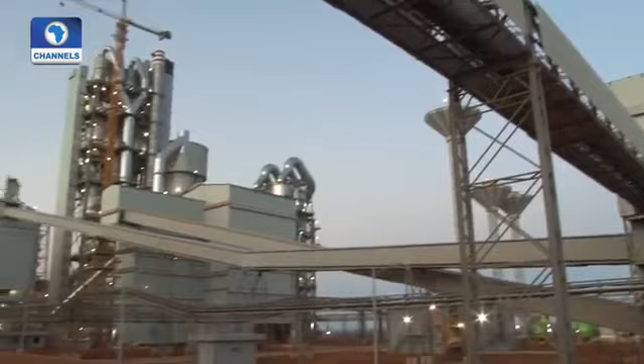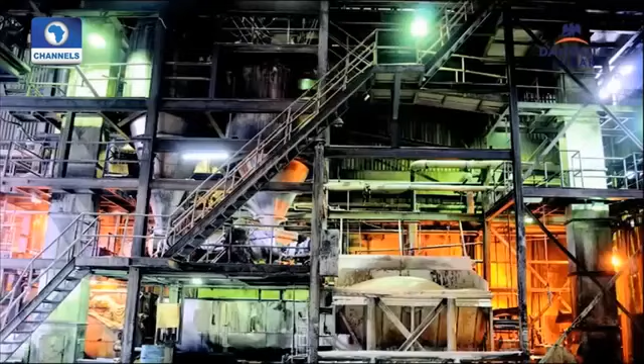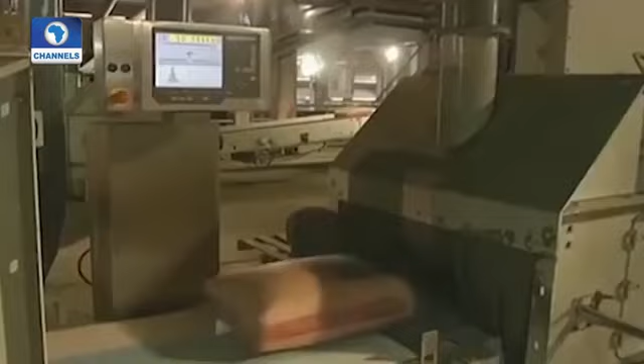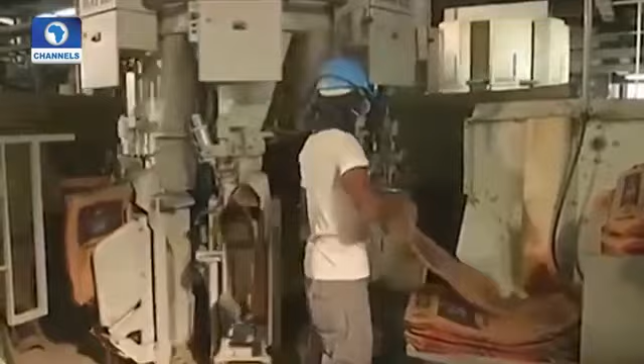His business acumen has been amply demonstrated in successful investments in sugar, flour, steel, salt, pasta, real estate, and beverages. He has also conquered the cement manufacturing business. Indeed, his company is Africa's leading integrated cement company, engaged in the manufacture, preparation, importation, packaging, and distribution of cement in Nigeria and 14 other African countries.

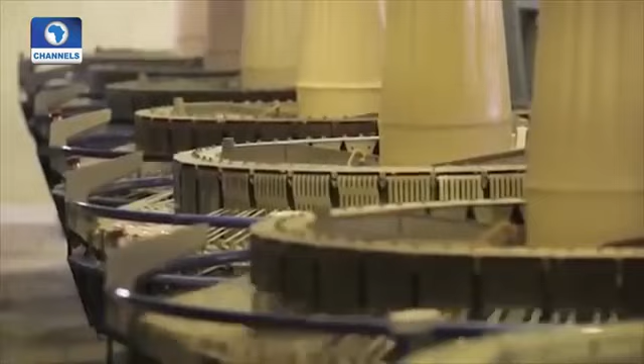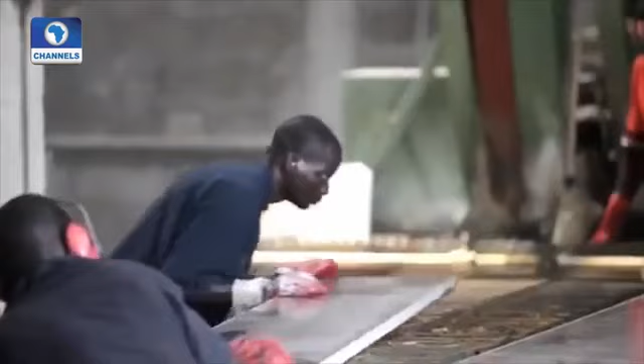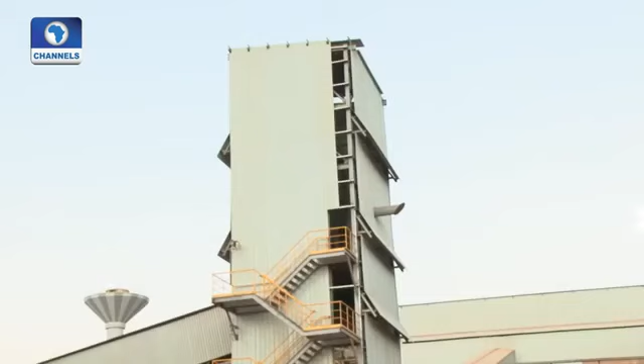The current total production capacity in Nigeria from its 3 existing cement plants is 29.25 mmtpa. It is also the biggest quoted company in West Africa and the only Nigerian company on the Forbes Global 2000 companies, with almost $14 billion market capitalization in the Nigeria Stock Exchange. Without doubt, therefore, Alhaji Aliko Dangote is success personified.

What gives me joy is how many people I've actually helped through job creation, through doing so many things, and in future I want to make sure that Nigeria is self-sufficient in rail lines, in power, in a lot of things.

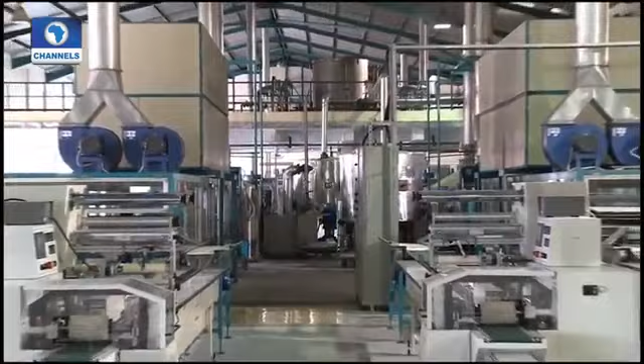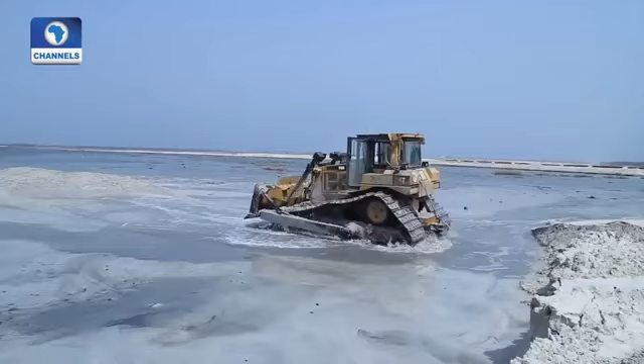3 years ago, the Dangote Group, which focuses on provision of local, value-added production and services that meets the needs of the African population, approached the Central Bank of Nigeria to indicate interest to invest in refining crude oil so as to facilitate the production of petrochemicals, fertilizer, and fuel.

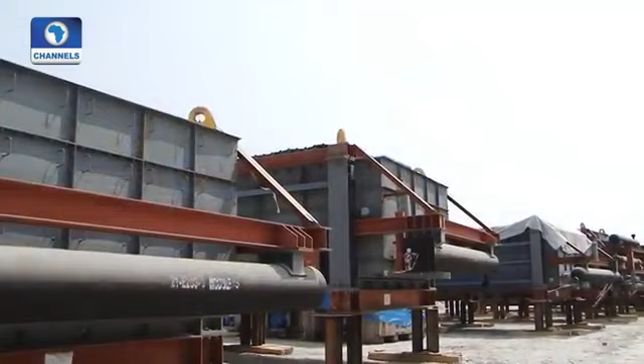Today, the Dangote oil refinery project, which is valued at $14 billion, is ongoing at the Lekki Free Trade Zone, Lagos State, with a tantalizing target to refine 650,000 barrels of crude oil per day.

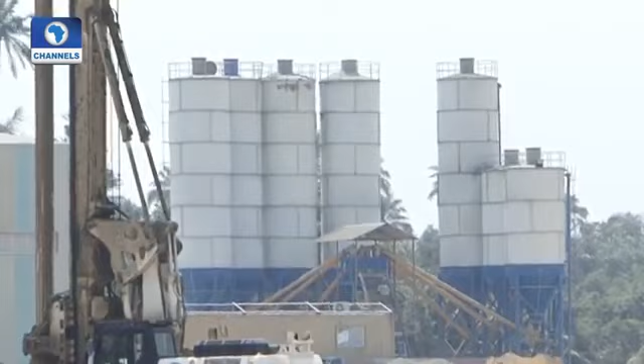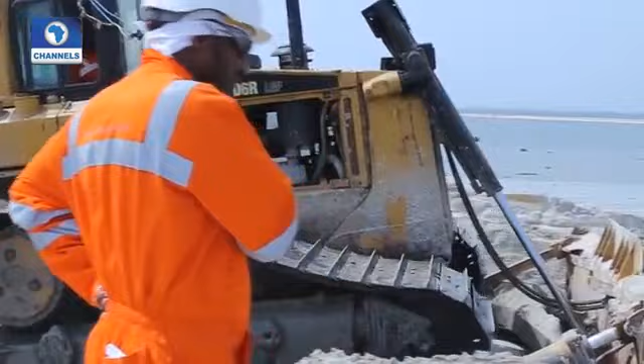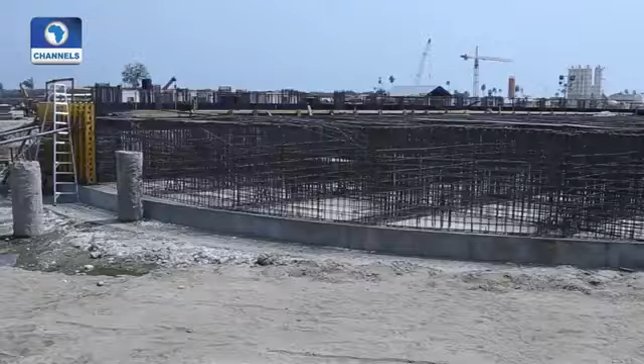The area of the refinery plot is 2,135 hectares. It has various process units and then dispatch facilities. It has its own captive power plant, sulfur dispatch facilities. It has a flare unit. It is a self-sufficient refinery that produces the power within the refinery, whatever the power consumption required.

This refinery will produce gasoline, diesel, aviation fuel, household kerosene, slurry as raw material for carbon black, as well as 2.8 million metric tons per annum of urea and ammonia.

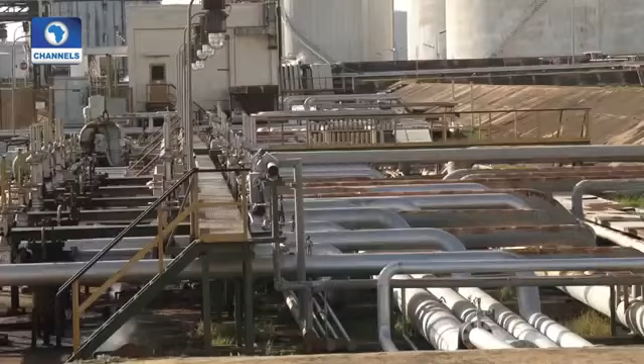A combined refining capacity of Nigeria's 3 refineries comprising Port Harcourt, Kaduna, and Warri is put at 445,000 barrels per day. In the recent past, it has produced about 6 million liters daily for premium Motor Spirit.

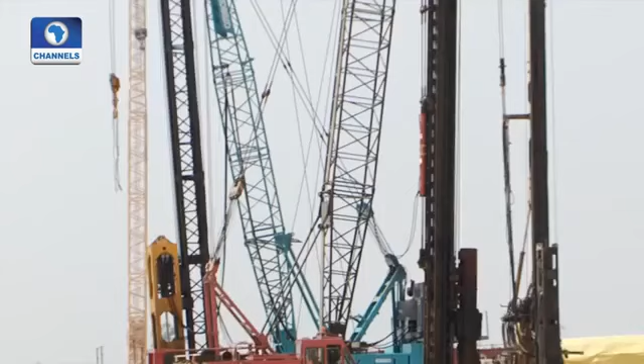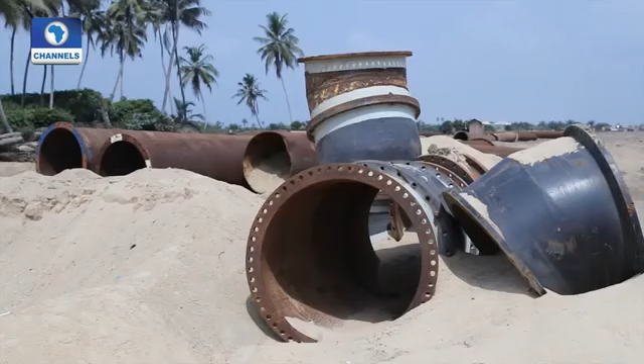When completed, this refinery will refine 650,000 barrels per day with yields of 55.2 million liters of PMS, 3.4 million liters of diesel, the high-end Euro 5, and 8.8 million liters of aviation jet fuel daily. At 55.2 million liters of PMS, Nigeria's daily consumption of 40 million liters is already taken care of.

Before now, Nigeria was a paradox, being one of the world's largest producers and exporters of crude oil, and yet one of the biggest importers of refined product. Trillions of naira is spent every year in subsidy claims for oil marketers, not to talk of immeasurable man-hours lost each time there is real or artificial scarcity of fuel.

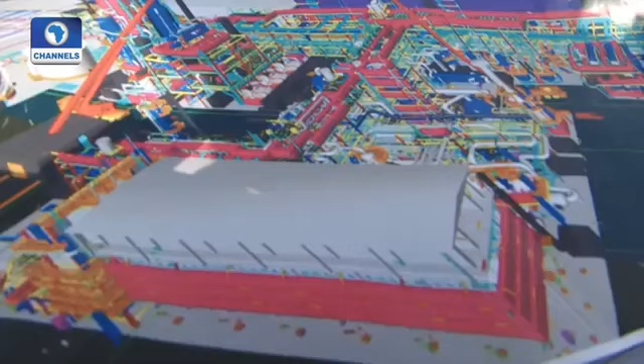But now, the first of its kind integrated oil refinery project will resolve this paradox with its largest single train refinery in the world.

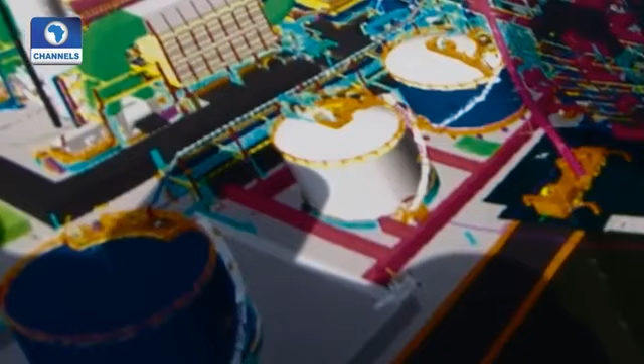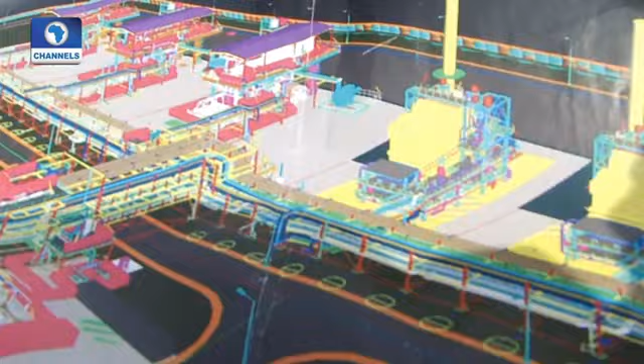In Dangote Group, we like challenging things and we like to make sure that we do things where we'll make our country proud and also self-sufficient. So once we do this, Nigeria will never ever import any oil at all. No petroleum products, zero. We'll meet up the full capacity, and we've taken up a land that will allow us to grow 3 times. So we have plans of also further growth.

But the challenges, I think, we'll be able to surmount most of them because, number one, we're a local domesticated refinery. Most of the logistics cost will not be there. And then we don't have to pile up a lot of petroleum products in stock because the refinery is there, it's working. Obviously, yes, maybe we'll have about 15-20 days of reserves.

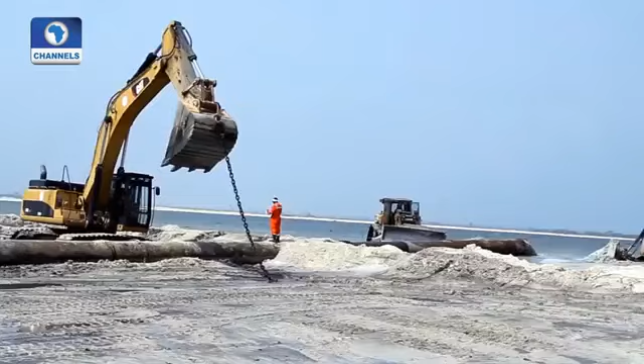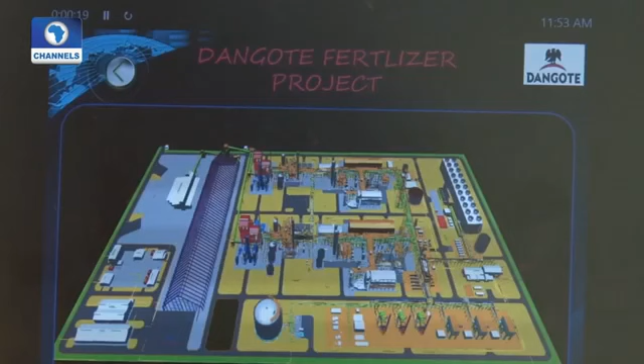After months of work on site, the dredging has covered a major portion, although heavy-duty work is ongoing. The activities and spillover have also been well thought out, and a smooth supply and distribution system is what will be obtained here.

This is the setting that prompted the governor of the Central Bank of Nigeria, Mr. Godwin Emefiele, to pay an impromptu visit to the Lekki site of the world's biggest refinery project.

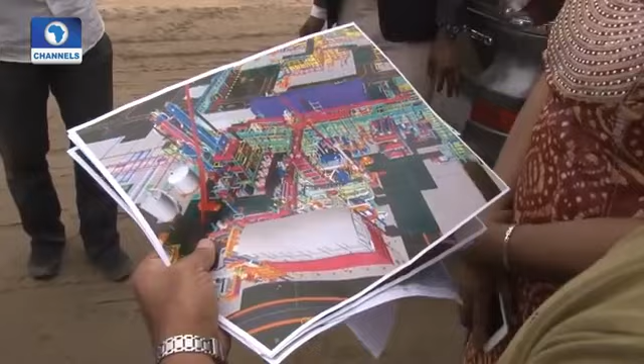Is it gas? No. For crude, we load by ship, but we're inside the sea - they call them SPMs. So you discharge, and we can also load 100% of the product through the sea. They told you Suezmax vessels use 3 SPMs.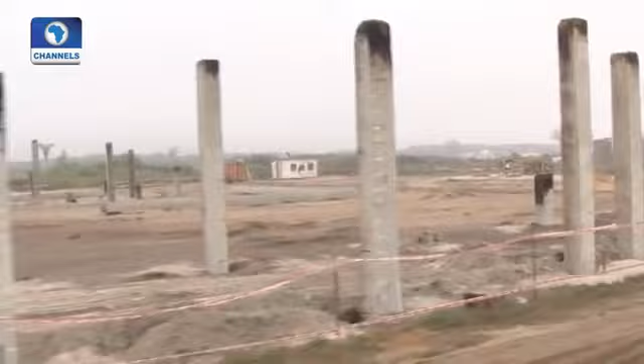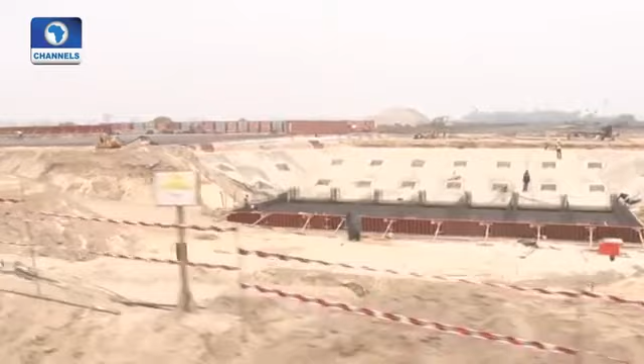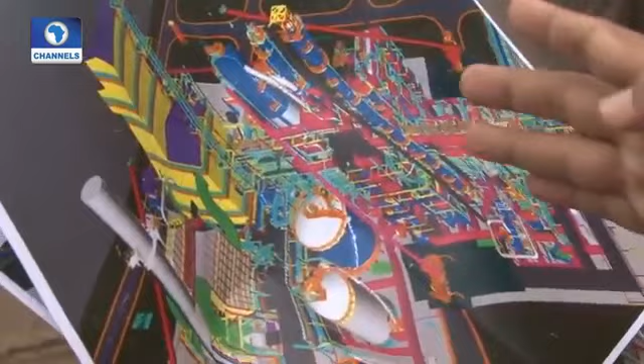The visit, which was like the gathering of eagles, afforded the CBN helmsman the opportunity to discuss with Africa's greatest entrepreneur of all time the critical need for a foreign exchange portfolio that will aid the importation of critically needed equipment - interest charges, handling charges which you pay foreign companies, demurrage.

So all this - for example, now if he needs, maybe he goes and buys one ship. That's what he does - you go and buy 35,000 tons. He doesn't have to buy. He will just say, okay, every day give me 3,000 tons. So you don't need all the storage and all the other costs. His bank will issue us an SBLC.

And that's 26 Naira per liter. You see, this is how they come - it's a precast driven by...

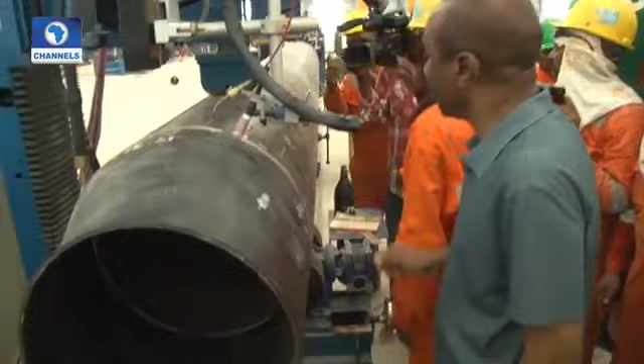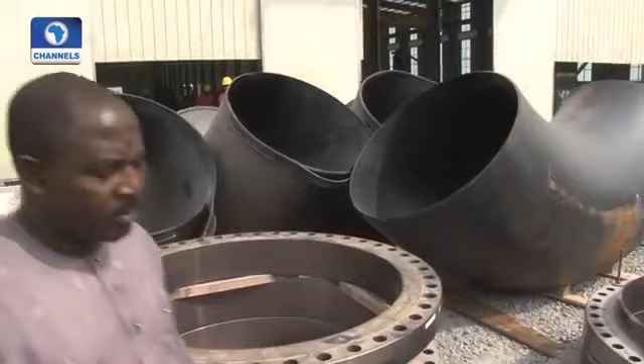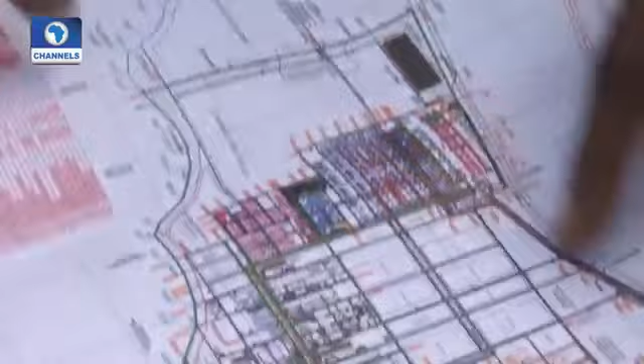You can see this is the whole site, and this is the fertilizer area. This is just the fertilizer area. So now you have the whole site, and this is the plot plan. You can see how the tank farms are coming, the various equipment coming in all over the place.

Apparently elated by the noble and patriotic vision that gave birth to the Dangote oil refinery project, as well as the infectious commitment of the investors towards the success of this ambitious enterprise, the governor of the Central Bank said: 'Your ongoing $14 billion refinery investment will enjoy our support, no doubt. We are doing this to fast-track the importation of equipment you need for speedy completion of that project, and to encourage other Nigerians to follow suit. This tour is necessary to lend our support to this laudable project that will transform Nigeria's downstream oil sector.'

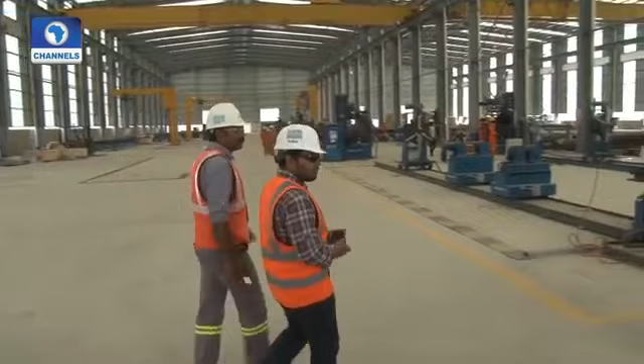Why have I come here? I have come here to see, so I can also tell Nigerians that we need more. We need to support and give support to people like Aliko Dangote for what they are doing for Nigeria. This is a time when we are talking about diversifying our economy away from oil.

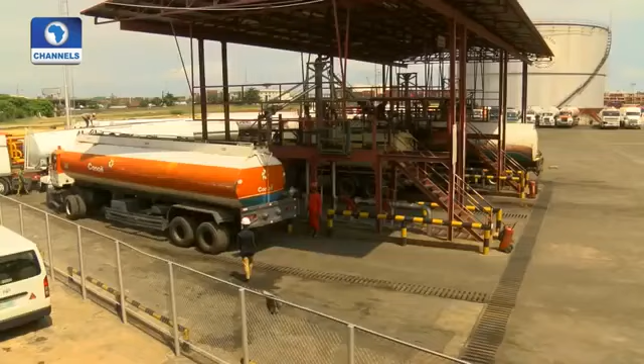Fertilizer's output is ammonia and urea. The petrochemical output is polypropylene and polyethylene. The refinery's output is the various final petroleum products. These are products that we today import into the country. If we dimension how much the country spends on importing these products, consuming foreign exchange, this stands at close to almost 35 to 40% of our import needs.

So you can imagine what would happen to the savings in foreign exchange by the time the fertilizer plant is completed in 2017, and the petrochemical and refinery project is completed in early 2018. We expect that by the time these projects are completed, they will not only meet the needs of our domestic requirements, but we will be exporting these products to the point where we will be selling foreign exchange to Nigeria, to Nigerians, and to the Central Bank of Nigeria to the tune of almost $6 billion a year.

That is the kind of project that we think we should support, and we think we need to encourage more Nigerians to begin to think like Alhaji Aliko Dangote.

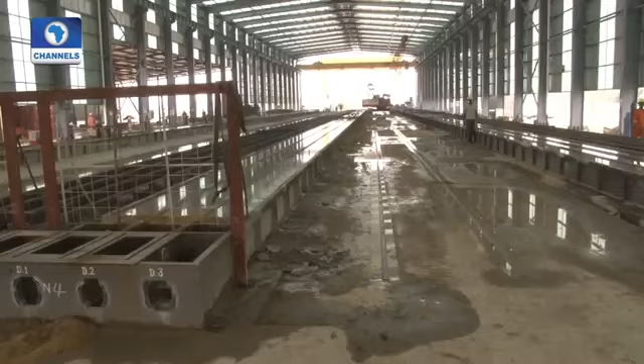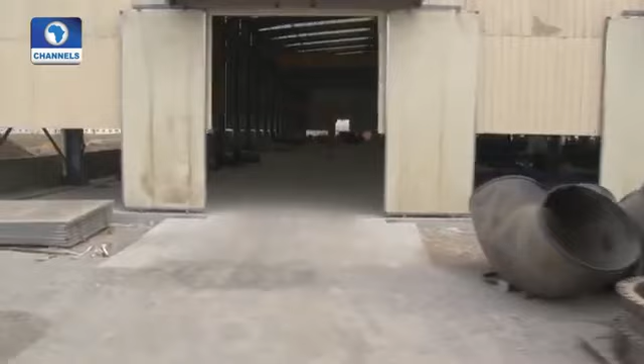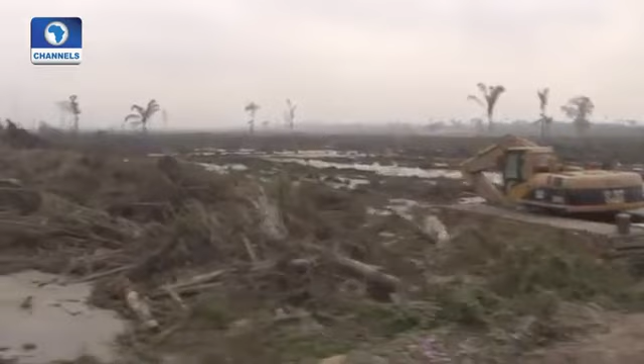You can float on the water. If you float on water, uproot all the trees, then you burn them. After you burn them, now you clear them out, then you pump sand. Compact, yes, and then piling.

I know the sand—they charge you per cubic feet. It's not that they don't know the measure. There's a measure, you and them will measure it. Like now, if you exceed that, who is charging you? The people who are there—it's not that they just come and feed everything.

That's right, they don't know. No, this is too young to know. They're the biggest in the world. I told you, from Belgium—those who brought the number 1 and number 2 products to the world, and the number 5 too.

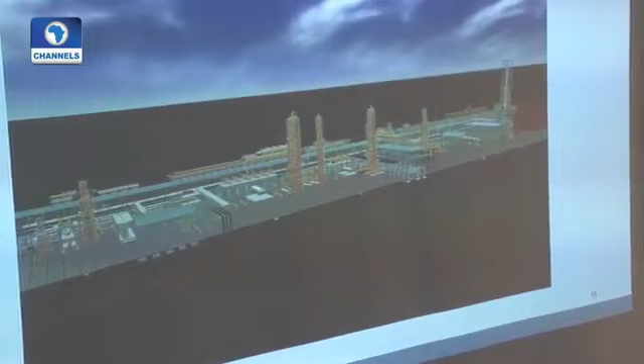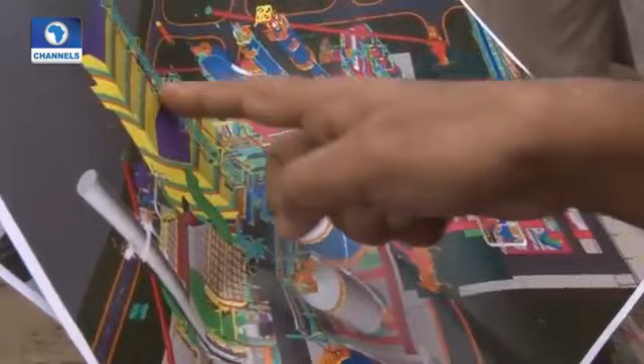We cornered two key officials of the Dangote group to get a grasp of the driving force behind this incredible investment in sub-Saharan Africa. It's the largest single-line refinery project going on in the entire world today, entirely funded by a Nigerian company, in our own great country, with 650,000 barrels per day. It's not only a refinery—simultaneously we're building a fertilizer plant, and it will also be a petrochemical complex to be integrated.

The timing of this project could not be better, coming with a new government who clearly have come with a message that Nigerians all have to wake up to a reality check. We could no longer afford to be an import-dependent economy, and the resources are not there—Nigerians have to tighten their belt, and everybody has to go back to the basics, back to agriculture, back to manufacturing. So I believe it's not surprising that the governor of the Central Bank himself was there, because this is what he wants to see more Nigerians doing, to make his job easier.

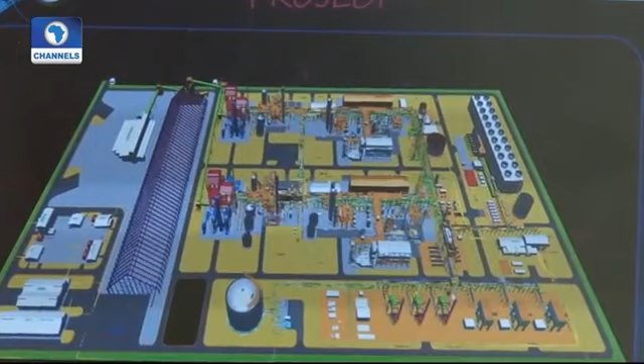At the moment, everybody is on his neck for foreign exchange, so he would be very happy to see investments that are going to conserve our foreign exchange by reducing our imports. In fact, ultimately, investments that will begin to make it possible to repatriate foreign exchange back into our economy. This is really going to be a boon to the country.

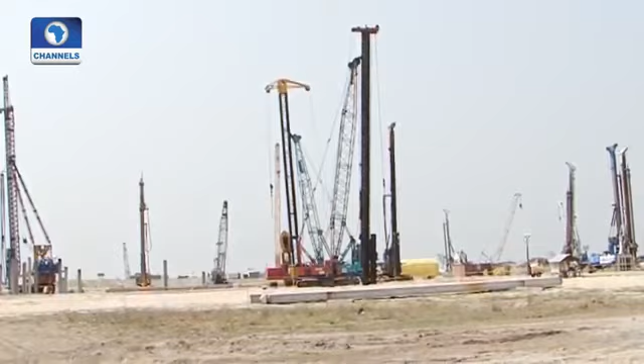The Nigerian crude is a sweet light crude, which has always commanded a premium in the past. But one of the reasons oil prices have been going down is that Saudi Arabia wanted to ensure they retain market share, because the Americans, especially with shale oil, have been developing it very fast. Their shale oil production and output has been increasing fast, and all the oil which comes out of that is shale gas and what they call LTO, light tight oil, which is also very light, a sweet crude.

If you see the exports from Nigeria to the US, it has completely collapsed. It was one of our biggest markets. Now exports to the US have collapsed, and the country has been struggling to get importers for the light oil. The US has a lot of refineries designed to handle light oil.

In most of the other parts of the world, to maximize profits, they started going for heavier, dirtier, high sulfur crude, because it was all available cheap. So the refineries were designed to handle that so they could maximize profits. So now when our primary market collapsed, we have been struggling to get enough demand to export this crude.

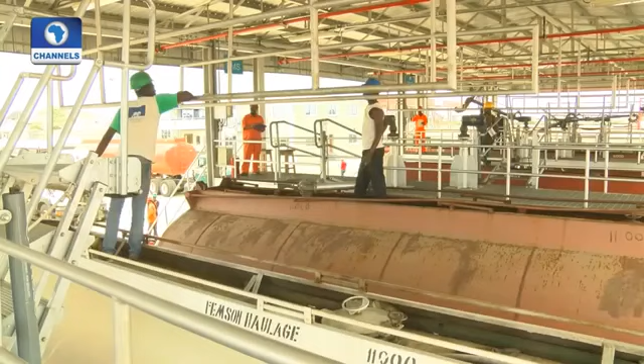And that is why, if you see the Nigerian crude, even the prices have been coming down. So we are now looking for a market instead of commanding a premium for our commodity, which is the oil, and we are still continuing to import the finished product. So this refinery will answer all these problems. Skills, market focus, and management orientation will clearly differentiate Dangote refinery from the pack.

We recognize that in every situation where there are opportunities, there will be challenges. Our goal is to address, circumvent, or clear these challenges. Government policy is one area of challenge. If the policies are not right, you're going to have problems. But these are risks of the business that we're willing to take, and in the investment game, it's a question of weighing your risks and your rewards.

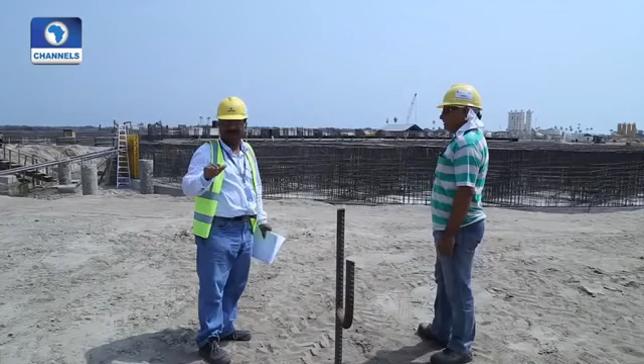We believe that despite the poor policy environment, we are willing to risk this investment because we believe that the rewards that come afterwards will be more than sufficient to justify the risk we're taking. The growth potential and trajectory impact is immeasurable.

Everyone is waiting. The whole state, Lagos, is also positioning itself to be a part of history. He has chosen this day to do his activities, and it's for us as a government to make sure we give him all the support we can get.

What is very important is that Dangote is not going into upstream exploration in Lagos. Rather, it's in refinery and petrochemical, substantially midstream and downstream. We're not competing. What Ibile will be doing is to go and look for the gas and bring it from under the soil so that we can service Dangote in the long run.

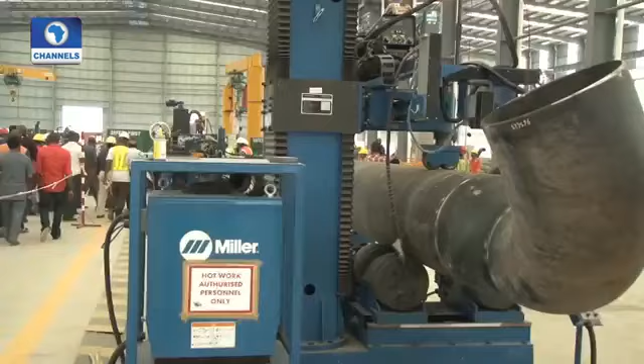So Dangote's intervention alone is going to change the entire economy of Lagos East as we see it today. And if you now combine that with the activities going on inside the free trade zone, the proposed airport and the deep sea port, it's going to end up in a massive transformation of that sector.

But that is not only the benefit Lagos will get. If you see the impact of tank farms in Apapa, with respect to all the trailers coming from all over the nation massing inside Apapa, it has almost collapsed the economy of Apapa. And that is not going to be sustained.

That is happening because we are bringing all the petroleum products we use in the country from outside. So if Dangote can produce from here, there will be no motivation to keep building more tank farms in Apapa. I think a lot of them will now be fading away gradually, and then you'll see our economy coming back again.

So for us, it's going to be multiple benefits to the states in terms of income, in terms of GDP, in terms of employment, in terms of helping us resolve the Apapa economic challenge, in terms of traffic.

Because the architecture there, as it's going on now, a lot of impact assessments are being tidied up with respect to transportation impact assessment, environmental impact assessment, because we don't want what happened in Apapa to also happen in Ibeju-Lekki on account of Dangote's activities.

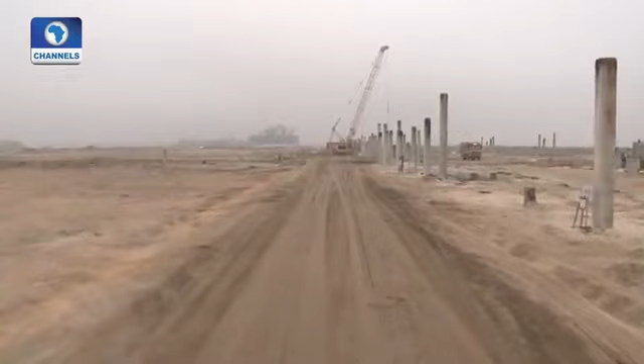And mind you, that place is not within town. So if there are vehicles coming in to take the products to other parts of the country, you just pass along the Epe corridor, and then you are in Ogun State, and you can go to Ore, you can go to the northern parts of Nigeria. Unlike if you were in Apapa, you still have to pass through Lagos Island, the Lagos mainland, Oshodi, until you get out of town.

The impact of the Dangote oil refinery project on the Nigerian economy will be both massive and monumental. The impact will be heavy to start with. First of all, there won't be any shortage anymore. And then money will not be tied down. You don't have to go and import 3-4 months stock, because the refinery is working. We have massive storage, which I think will assist in the supply chain.

There's something people don't normally notice. If you go around, outside Lagos or Ogun, majority of the filling stations, you see that yes, there's a filling station, but there's no activity. Actually, I didn't know this until we were driving in Kaduna with Bill Gates in January, and he said that this is the only country he has seen where the filling station is not working.

You see filling stations with people there but no fuel to sell. This will not happen anymore. Anybody who opens a filling station will have something to sell. Imagine the thousands of filling stations we have—even if there are only 5 people each, it's a massive number of jobs created because we'll make the product available. You don't have to buy what you don't need; you only buy when you need it. So it's going to open the market dramatically.

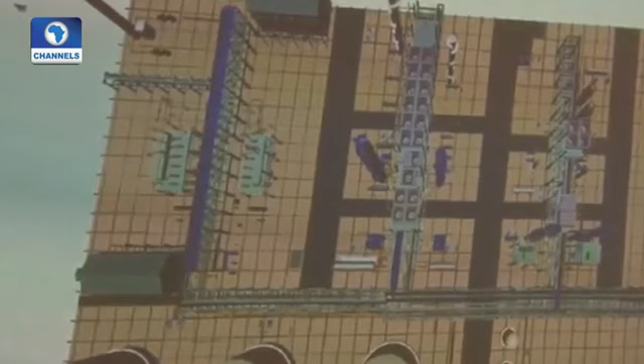This is going to be unique in the sense that there is no refinery existing in the world today of this size. There are big refinery complexes, complexes in Singapore, and the largest refinery complex today is in India—the Reliance refinery. But they have multiple trains of refineries built over the years; there is no single train of this capacity existing. So all the equipment and sizing is unique—we have to design equipment which has never been designed in the past. It's a matter of pride for the country to claim we have the largest petroleum refinery in the world.

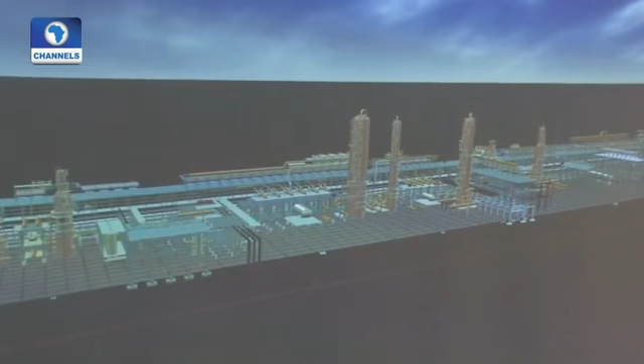Number 2, it has a wider range of capacity. It can not only handle Nigerian crude, it can handle all African crude and also certain varieties of Arabian crude, so it has the capability to process a wider range of products. Number 3, the refinery also has the capacity to produce the best quality in the world—Euro 5 grade fuel—and our refinery is already designed to meet that quality. That's again another very unique feature of this refinery.

Another feature of this refinery is that it's designed to extract the best out of the crude oil, because there are refineries and refineries. You feed in crude oil, add some value, and get the outputs—this refinery is designed to take up to the last juice out of the crude oil. So it will maximize the value, maximize the revenue generation, and maximize the value of the crude. This is another very unique feature of this refinery.

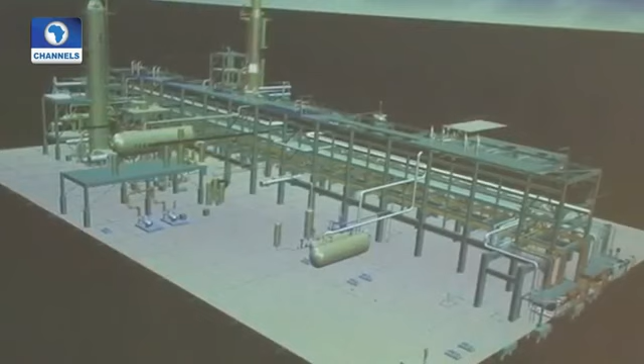This is going to be one of the most sophisticated refineries in the world, the way we have designed it. In December 2017, the Dangote oil refinery project will come on stream. May God keep us all alive to see that beautiful day.